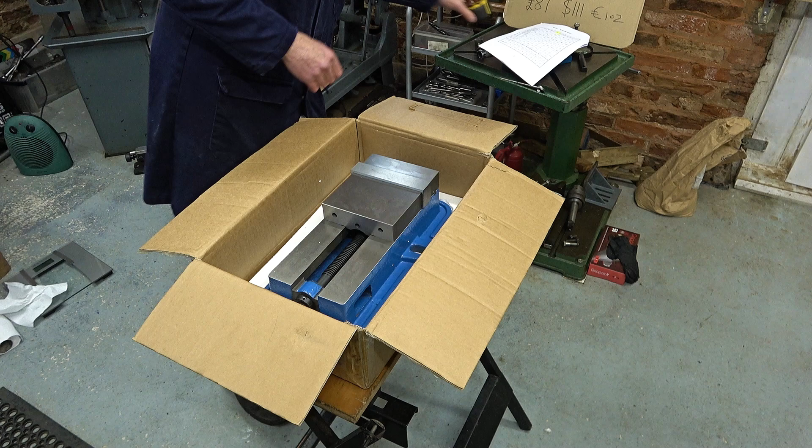The vise - it's a bit of a beast, as you can see. So the 6 inches that they refer to is this, but actually when we come to look at the manual, it's 160 that they refer to, which is this. Anyway, let's get it out and weigh it.

I've seen several weights mentioned, so we'll just check what it actually does weigh. So I should tell you what the price is. For this lump, it's 87 pounds UK, 111 US dollars, and 102 euros. Now that's just a straight conversion, I've not priced it in those regions, it's just by doing the conversion.

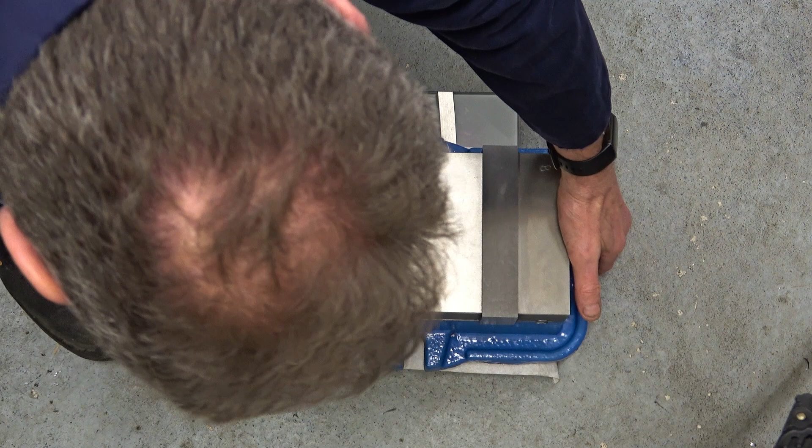I'll do this in kilos to start with - 21.5 kilos. Now these vises, they come with a rotating base stand or just without, so obviously this is the one without.

I'll do one in pounds - I won't bother with stones. So in pounds, 47.4 pounds.

We'll look at the spec sheet in a minute, but just to give you an idea, it's 8.5 wide, so that's about 215, and it's 16.5 long, which is about 415.

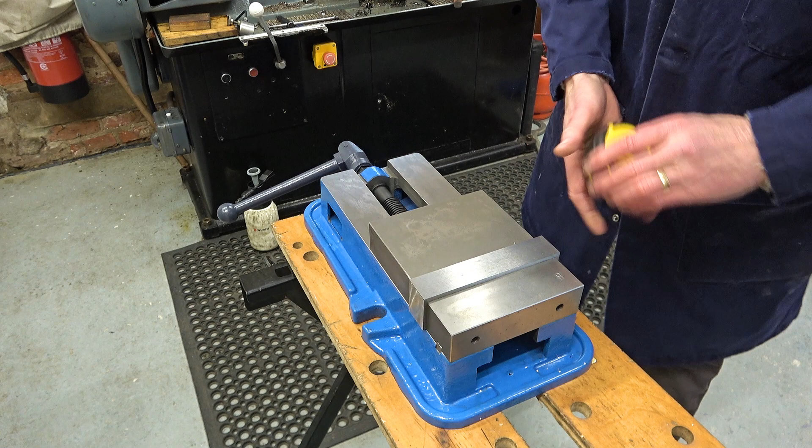And it comes with this quite extensive skirt around the outside, which means that for this vise you need really a very wide mill table. But this skirt, as I call it, catches the coolant and then the excess coolant runs off here at each side. And also you see here this cutaway - well, the coolant pouring down the centre here runs out into this tray and then off.

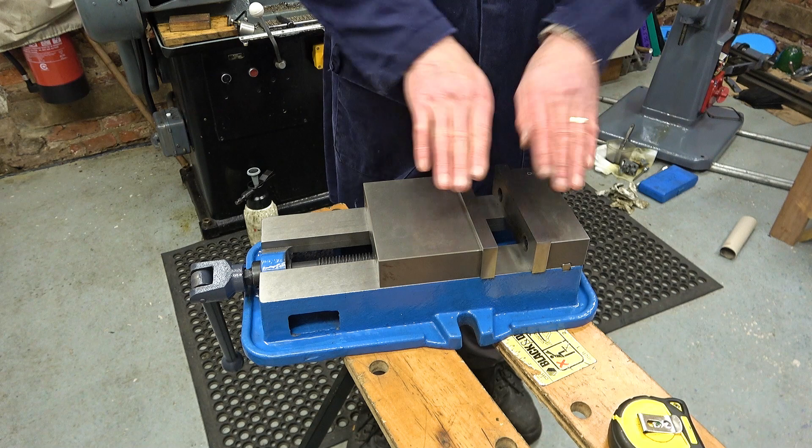It comes with a pretty stout handle, and these jaws, they both reverse, so you can have the jaws facing inwards, or one in, one out, or both out. And again, we'll look at that in the spec in a minute.

Now the way you take the jaw off is there's a screw there, and this one is screwed from underneath. There's a key strip in there, I think you can probably see that there. The screw is about 27 millimeters in diameter and the pitch is about 4.5 millimeters.

Now let's just quickly look at this, taking this off. Okay, so then this has got like a hook side to it and it hooks underneath there. That's it. You can see how well this is all machined - it's really nice actually. And then there's a kind of hook in there as well.

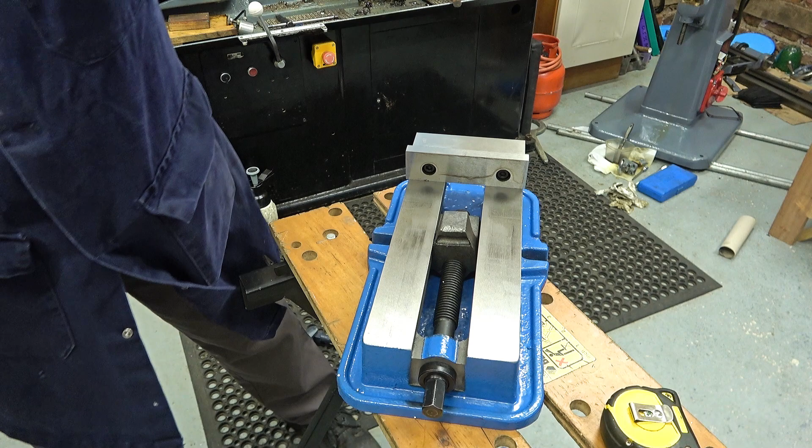So this will reverse, although I'm not sure, you know - hold on a minute, I'm not sure about this. You see that, yeah? Let's zoom in slightly. Okay, I think the idea is that this goes in to there. I'd have to check that. Have I understood this correctly? That's the thing - where are we? That is intended to go in there, isn't it? It might be that these bits have to be taken away. I don't know - this is why it takes a few hours to do these reviews.

I can't really see in there properly. I suspect you'd have to take off those two flashings there. There's a bit of flashing you'd probably want to take off. There's a chip out of there, so the coolant would run out okay, and it's okay at this other side nearest me. I'd probably just file that off.

Now, the thing about this vise is it's got hold downs here and here, and I was surprised to find there are no hold downs at the end. Let's just zoom out for a second.

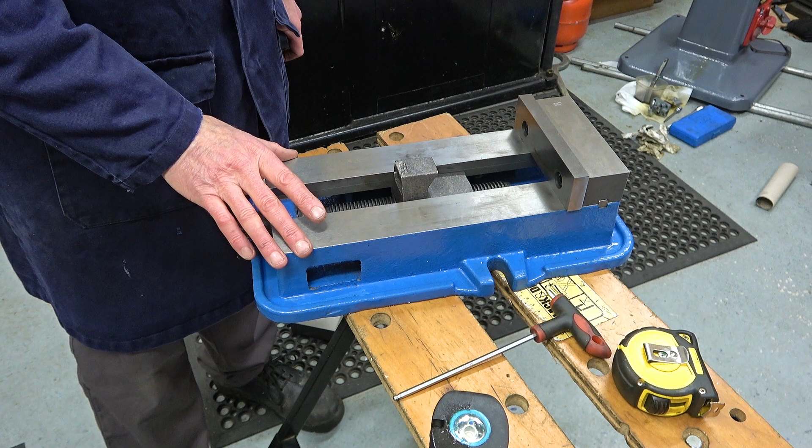So if your table's not wide enough and you can't get the bolts in here because your T-slots aren't going to line up, we'd have to find a different way of holding it down along the length of the bed. This vise is wider than my bed, so my useful working space on my Harrison mill, which we'll look at in a minute, is only 8 inches side to side, and this is 8.5. So these stick off the end of my table, and the gullies here would conveniently pour the coolant off the side of the table and at the near side probably onto the floor. But that's the consequence, I think, of being such a big vise.

Vevor operate a kind of catalogue which influencers, that's a joke, isn't it? I'm an influencer, can select from, and this was the size of vise that they offered. Now they make vices in numerous other sizes, which we'll talk about, but I'll just drop this onto the mill table now so you can see.

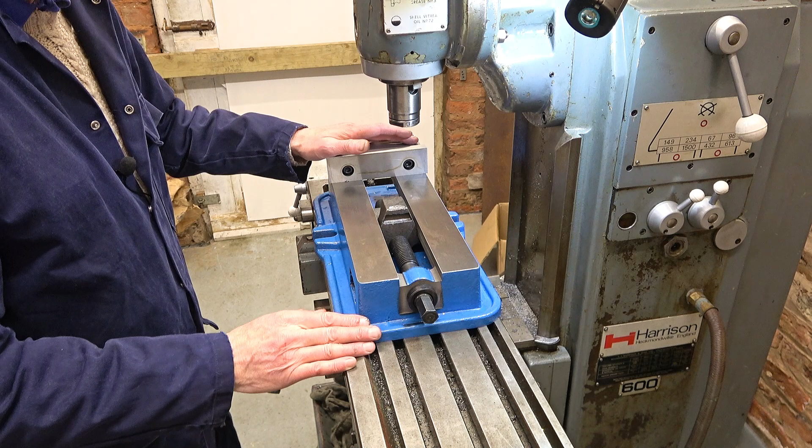Well, here it is on the mill table, and you can see I have 8 inches across here. This is 8.5 inches to here. These lugs are even wider. The bolts would go in there. Well, that's nowhere near any of my T-slots, which are here, here and here. But I would be able to clamp it down on the ends if I had the right sort of fixing.

Now this fixing comes from my surface grinder to hold the magnetic vise down. So I could, maybe not just there, but I could, there, look, do something. Which way around would it be? There we are. I could put something through there and clamp it there. I could machine some flats on here if I wanted to. So it's quite possible to hold it down.

But if I show you the underside, it's quite curious that they don't have hold downs at the ends, because the underside is set up for holding it down in this direction or this direction. So if you buy it with the revolving base, that goes into there and runs here, no doubt, fairly obvious. But the vise comes with some T-slot engagement lugs. I don't know what the right words are. Yeah, so here's the hold down bolts, which are massive.

A bit big for my mill. You see, Vevor didn't have other sizes for me to review on the catalogue from my view. My login, I just saw this size, you see.

So here are the tramming lugs, let's call it that. They go in there like that. So you've got them for sideways across and lengthways as well. But there are no hold down holes lengthways. Just what it is, right?

Now, looking at the width of these lugs, what did I measure them? 18 millimeters. Whereas my T-slots are only half an inch, so we're a mile off being able to fit that in on this mill. Just saying, it's not a problem. Just saying that's what it's like.

Anyway, I think it's time to look at the spec. This is where portrait meets landscape, but I think we can manage. Now these diagrams are showing the opening of the jaws for the different models in different configurations. So it arrives in this configuration, and the rest is obvious, okay?

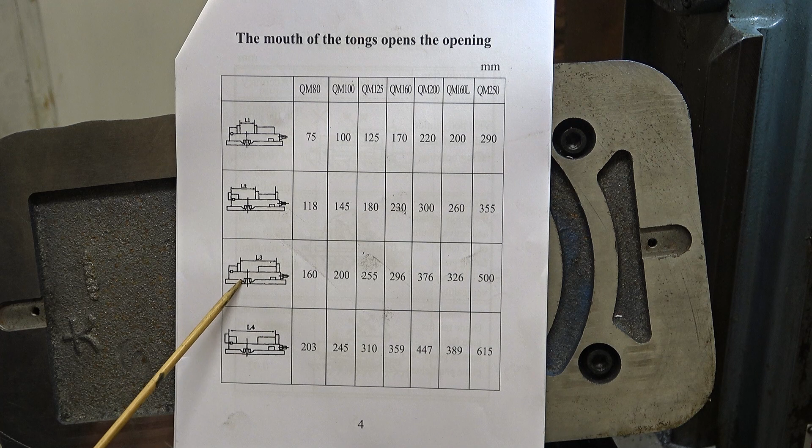One turned, both turned. And then the models across the top, 80, 100, 125, 160, 200, another 160 and a 250. So that's about 3 inch, 4 inch, 5 inch, 6 inch, 8 inch, 6 inch again, and 10 inch. I don't think Vevor sell all of these. They sell the 3, the 4, the 5, and the 6 for sure, with or without, this 6, with or without the swivel base.

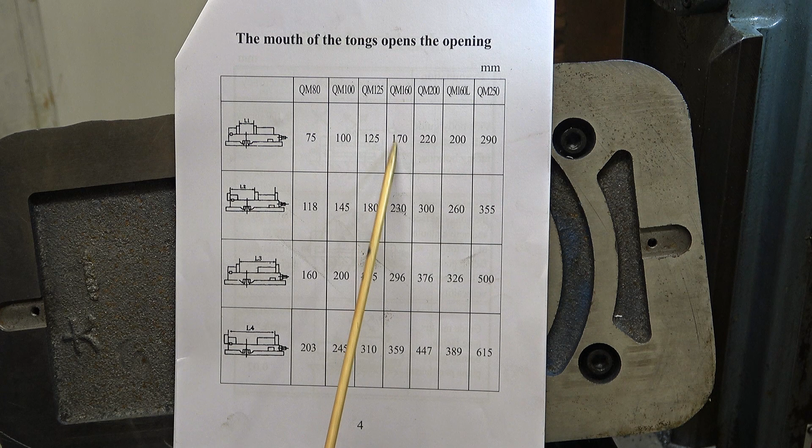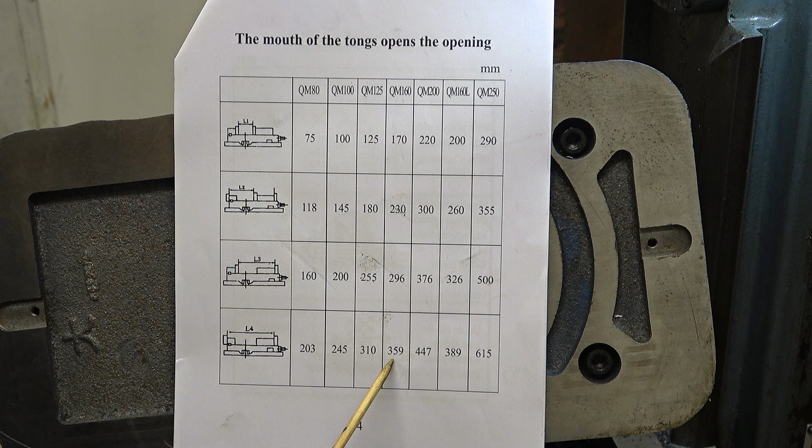Anyway, I'm not going to go through all this, but what they're saying is normal opening with the jaws facing in towards each other, 170 millimeters for this particular model. And then if you reverse the jaws in that style, it's 359 millimeters. So that's about a foot plus 2 inches, 14 inches, something like that. Now, some of these are quite hard to understand, but I think we can figure it out.

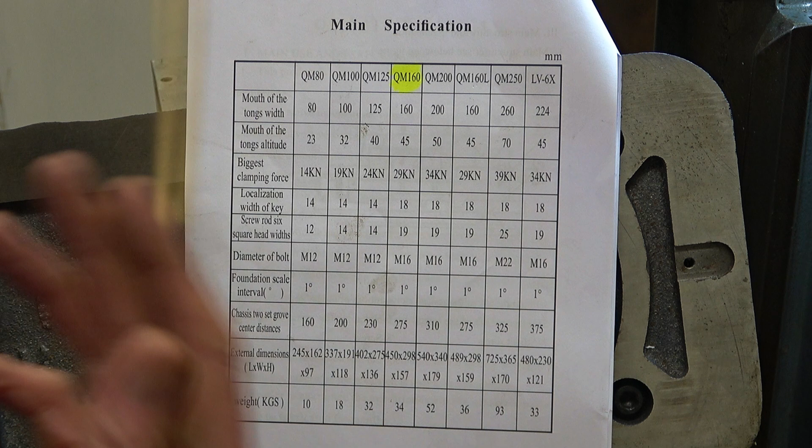So this is what I think this vise is, this column here. So mouth of the tongs, width, well, tongs must be jaws. So 160 width of the jaws. Mouth of the tongs altitude, well, it's 45 millimeters tall.

Force 29 kilonewtons. Right, localization width of key. That's talking about these. Where are we? 18 millimeters. Localization width of key. Some of these I can't work out. Screw rod 6 square heads width, 19 millimeters.

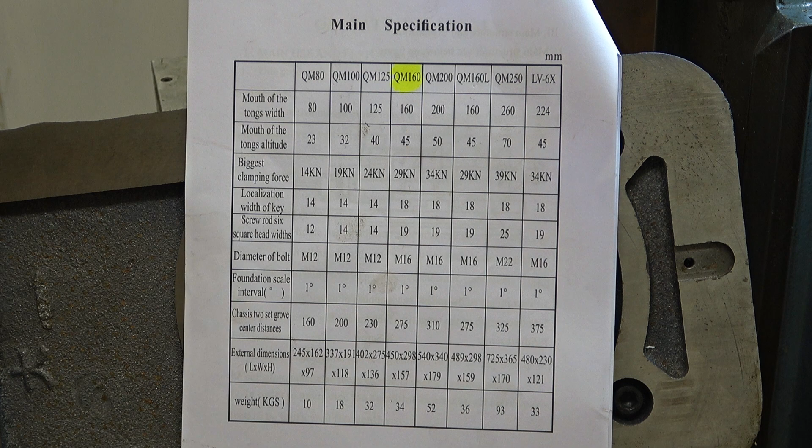I think it might be that square. Okay, we'll try it with this. 19.49, so it's actually 19 and a half. Now I'm not going to go through all the rest because there isn't any point.

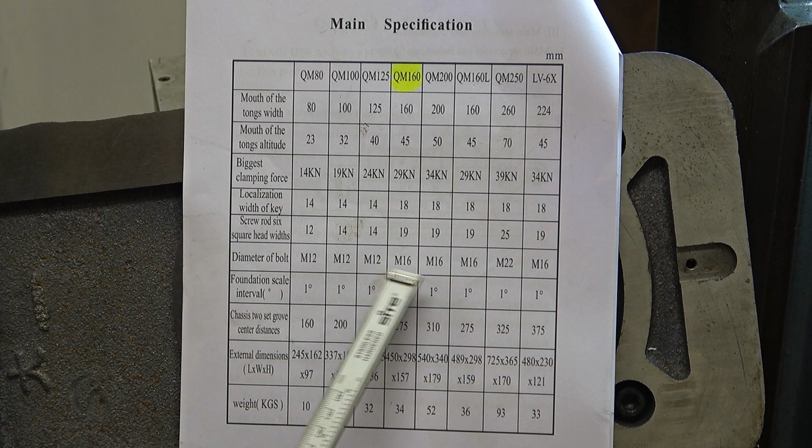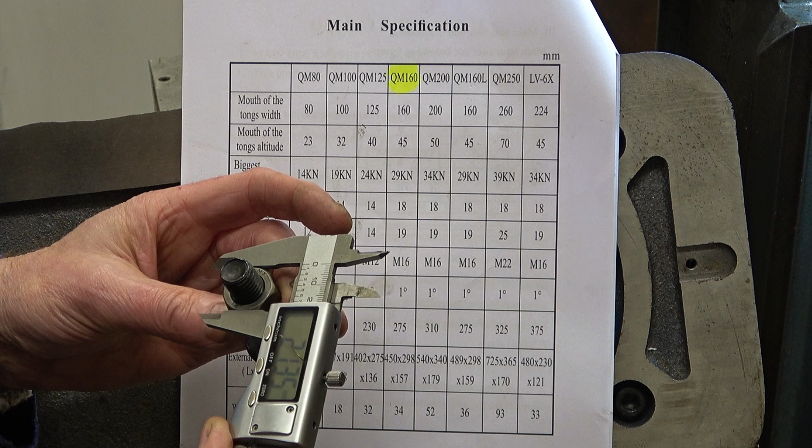That one, diameter of bolt, M16. Well, I don't know what that is. Is it that one? That's 14, definitely 14. That's 21, near enough, 21.36 for some reason. So I don't know.

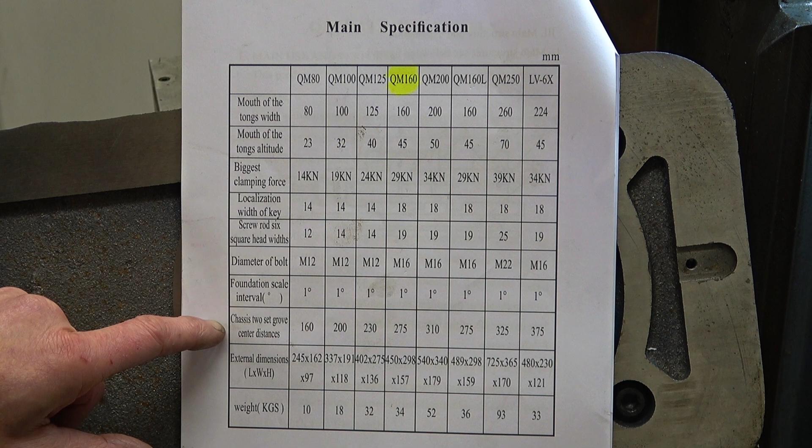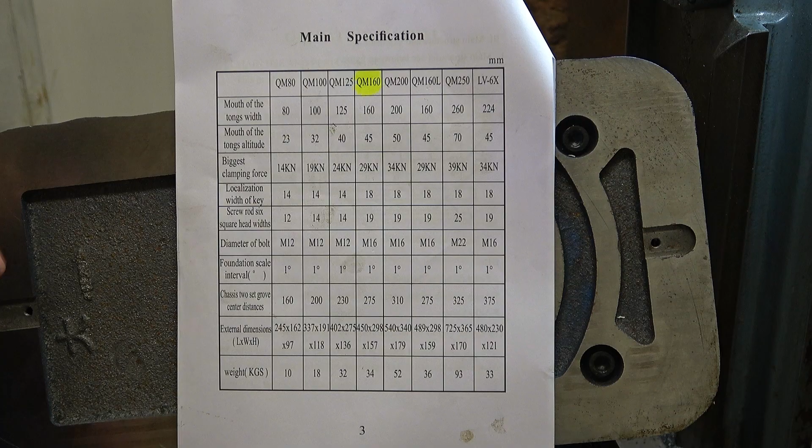Right, chassis 2 set groove center distances. Well, looking at it, I can't find anything that matches chassis 2 set groove center distances, but now I understand chassis might be the rotating base that goes on here. Anyway, enough of all that, I think, already.

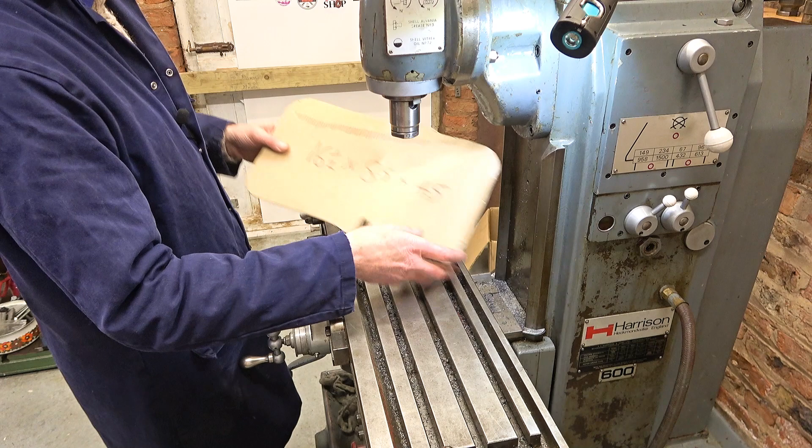I'll just move this for a moment then. Now, I made some cardboard cutouts, look. So 6 inch, 87 pounds, 111 US dollars, 102 euros. 16.5 inches by 8.5 inches by 4.5 inches. Hang on, I need to check what that 4.5 inches is. Yeah, I've got it. The 4.5 inches is that height off the bed.

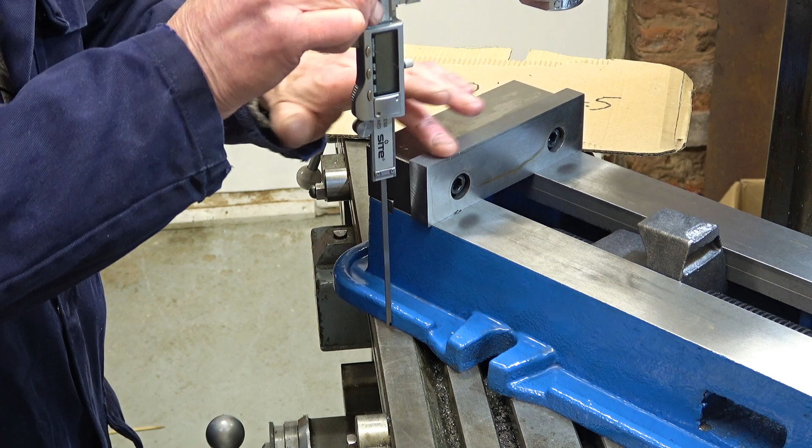Okay, so that's the 6 inch vise. Right, but I've made cutouts for the other sizes. The 5 inch vise. Now I did this only by scale drawing, so I can't say that this is exactly where these are going to line up. But that's the 5 inch vise.

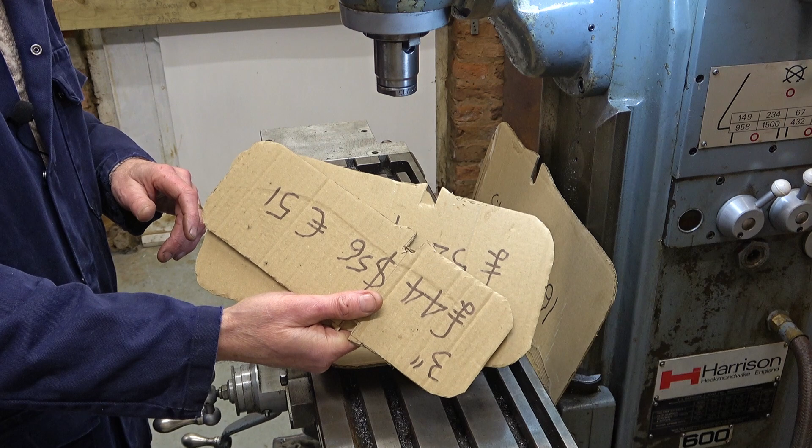Okay, now I can tell you for these other cutouts I've got here for the 4 inch and the 3 inch, none of them line up with my T-slots. Oh no, that's not true. One of them only, the smallest, lines up with my T-slots. So for the 4, the 5 and the 6, this way you'd have to be holding them down at the ends there like that. Anyway, £68, $87, 80 euros.

And you can see those, I won't leave them out. So it's the same height off the bed for the 5 inch. 4 inch, £52, $66, 61 euros. Right. So even that, you see, wouldn't line up with my T-slots.

If I get one in the T-slot, this one's in the coolant channel. So again, you'd have to be holding that at the end. Those are the sizes. Right, so a little bit, not quite as tall, a little bit less, but not a lot. And then we've got the tiny one, and this is the one that would line up with my T-slots.

£44, $56, 51 euros, 3 inch. The curious thing about this is it's only 2.8 off the bed, so I think they must have quite slim jaws. You just have to check that. But there's a range for everybody.

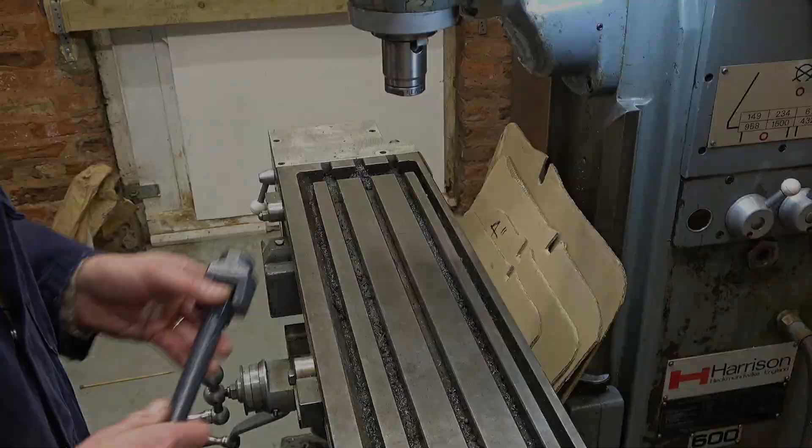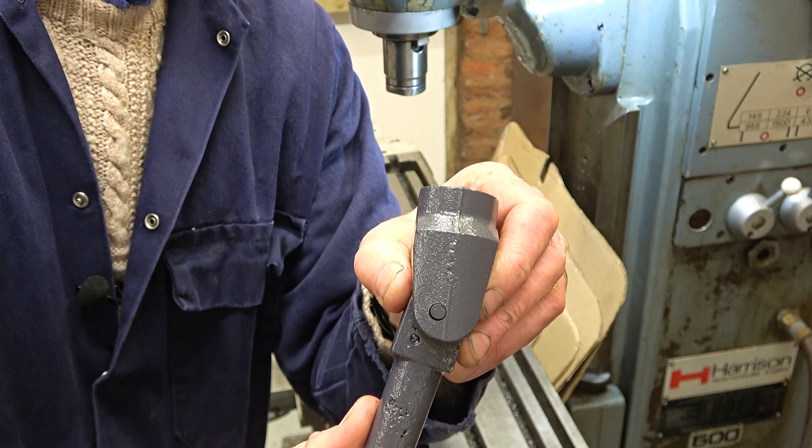This handle, I'm not so happy with, because somebody's been super lazy and they've drilled the pin off. So there's the pin, which I can see wiggling as well. And I don't know if you can make out that angle, look. But it's easy to see. It starts on the casting there, on the casting line, but at this side, it's right over there.

So it still functions, okay. But a bit of lazy work, that. I'd probably, perhaps this will be cast steel, won't it? So I'd probably just weld that up and re-drill it, just for my own satisfaction.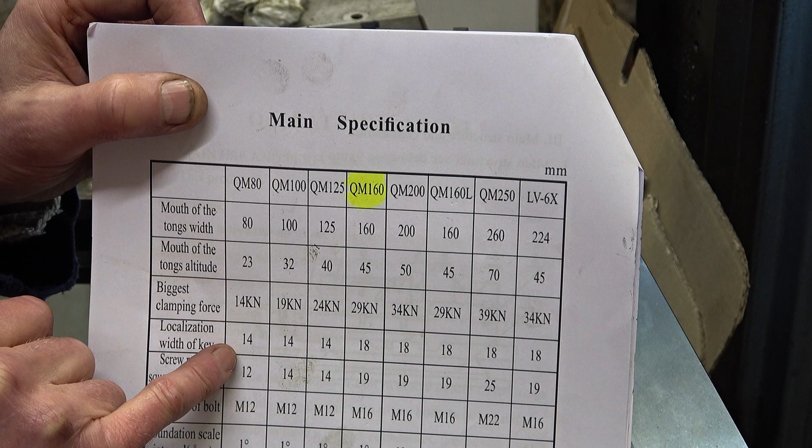Whilst I think of it, the tramming key, that's what I mean, that block that goes in the T-slot. So on this vise we said it's 18mm. Now even on the 3, 4 and 5-inch vices, it's 14. So I'd still have to machine those a bit narrower to fit in my 1/2-inch T-slots.

Now sometimes when you're trying to assess something, it's good to compare one with another. So this vise I got from Facebook some time ago. I think it's Indian. There's some things I like about it. It's got hold down lugs at the two ends. But a disadvantage with it is this part, the bed, I'll call it the bed because I don't know what it's called, doesn't come right to the edge. I don't know if you can see if I tip it up, look. Yeah, it stops there.

The problem with that is, if I'm using these quick index blocks, they're not supported to the edge. It's very difficult to get them settled correctly, whereas with this, it supports right to the very edge. So that's quite an advantage with this style of vise.

I normally only review things that I want for myself. Can't guarantee that'll always be the case, but right now I wanted this vise, or at least this style of vise, primarily for that reason.

The other thing is, we've already seen that this has tramming keys underneath. This one doesn't have tramming keys, so I ended up drilling a couple of holes in it somewhere. This also sits on a swivel base, so that's an advantage again to this one, because this is a proper milling vise.

We better do a quick accuracy check. Now, I'm not going to bolt it onto the table because it's a bit difficult to do, but we'll just measure across here and then we'll measure vertically on the jaws. When I'm measuring vertically, of course, we're hoping that my mill is accurate, because that's what we're comparing against. So just laid on, not bolted down.

Not cleaned either, by the way.

Okay, there's a bit there, isn't there? Perhaps a thou to 100mm, something like that. But if I clean the base, I might get better results than that.

That's repeatable. This is where I knock the tripod, like that. Well, I don't think there's much wrong with that, is there?

Well, end of review. I think it's excellent value, £87 for a vise that size. You might just make a couple of minor tweaks to it, but you can see it's all basically sound.